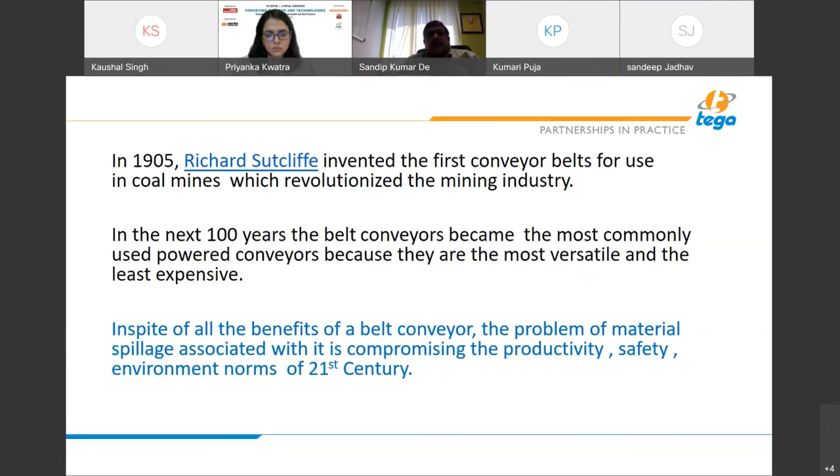We all want this clean, safe, uninterrupted conveying. But unfortunately, this does not always happen this way.

This is sometimes really scary when we go into a plant and encounter this kind of situation. I can feel the pain of the people who have to operate the plants day in and day out and still get the best production out of it.

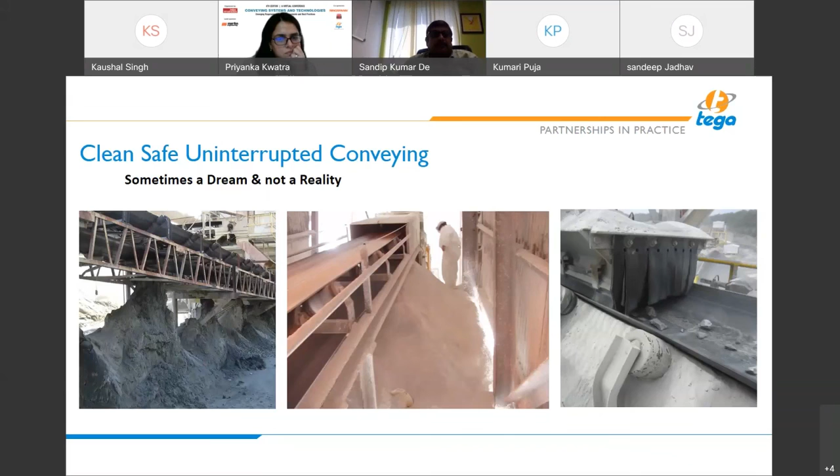All these are very simple consequences: it will increase a lot of maintenance cost of both workmen and equipment, production loss due to unscheduled shutdown, less life of belt idlers and pulleys. There will be high cost because materials will not be salvaged, and power consumption will increase. We all know this.

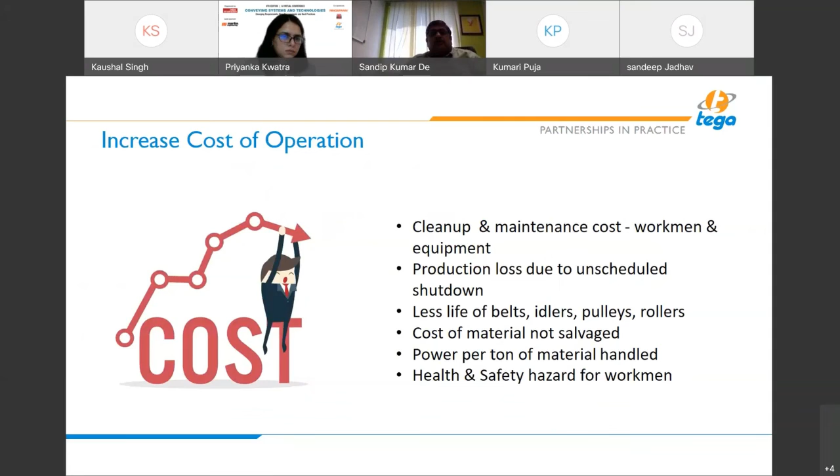But the question that comes to our mind is, why do we land up in this kind of situation? The plants are ultimately designed by engineers, run by engineers, maintained by engineers, and we are all concerned about spillage.

But where actually is the gap? Why do we land up in this kind of spillage, which is not very uncommon?

These are pictures taken from plants all over the country, and as I said, time and again these are quite common pictures. Obviously the people who are here today, associated with this industry and these plants, are also aware that these exist.

Now there can be many reasons; not one reason alone can be a factor. Some of our observations over the years I have put in, and I will try to go into some of those observations and points and elaborate on them.

Maybe some of the points will exist in one plant, some of them will exist in another plant, but overall it can be summed up in this way.

Conveyor systems are designed with a focus on design based on power consumption; today it's also important that you are designing it for safety. I think more focus has to come from the point of designing it for spillage management also.

Obviously this presentation cannot cover all those subjects here, but I will take up one small example just to elaborate on the kind of things that we generally face, which are a constraint for better spillage management in that conveyor.

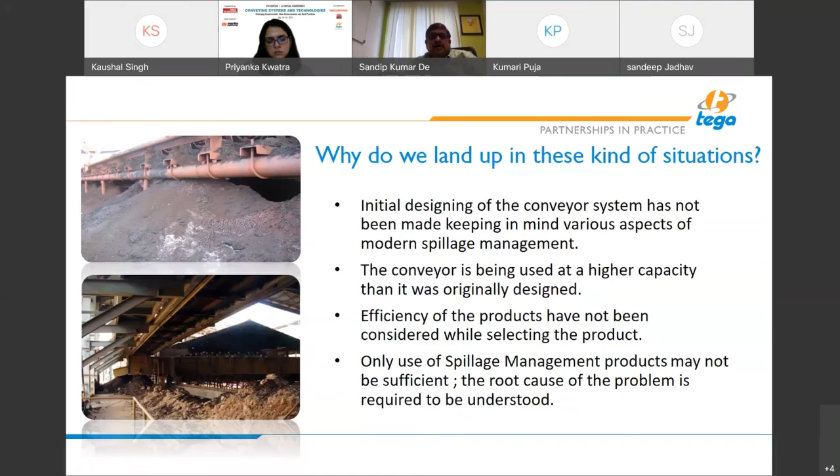Now, moving forward, let me take two small examples of when we go to the plant and find that spillages are happening. I'll explain a little bit on that. A picture on the left, if you really see, shows a lot of material spillage on the side of the conveyor.

Now, if you look at the size of the spillage material, and you have the skirt sealing system in place - although it's quite a traditional product and probably not the best one fitted in the system - still, the amount and size of spillage you can see clearly depicts that it has not happened because of the skirt sealing system that is there.

What probably happened here is that if you really see, the skirt board side plates are absolutely at the side of the belt. Many times you come across loading stations where the skirt board plates are right at the edge of the belt, and as soon as there's a little sway of the belt, you get a lot of spillage.

Now what happens - this is supposed to be not more than two-thirds of the belt width. Sometimes we ignore that, we don't stick to that, and we land up in this kind of spillage problem.

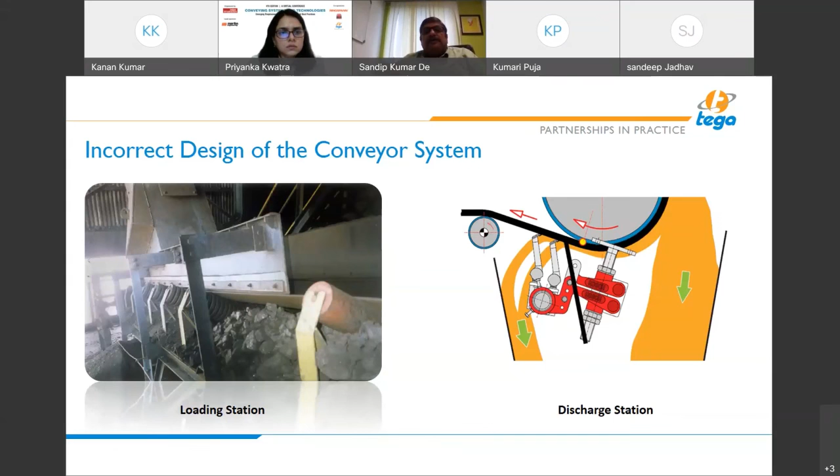Let us talk a little bit about the efficiencies now.

Now, this is what we all do. The conveyor belt will spill material throughout the length of the conveyor at the loading station, during conveying, and at discharge. The sealing system in the loading station is bad, and obviously there is a lot of spillage out there. Maybe the belt is swinging, that's why you have a lot of spillage while conveying. And again, at discharge, there is a lot of carryback spillage coming in.

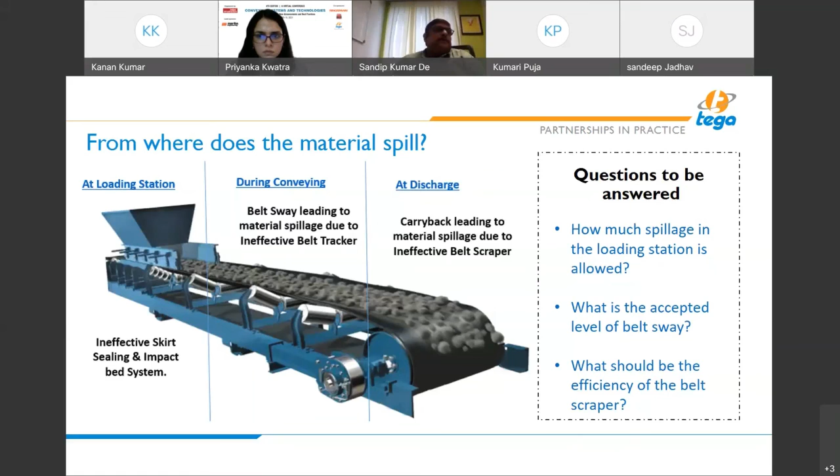But we must be aware of how much spillage in the loading station can be allowed. What is the acceptable level of the belt sway? What should be the efficiency of the belt scraper?

Peter Drucker says that what cannot be measured cannot be improved. These photographs again show you that there is so much spillage in the loading station, the belt is swaying, it is cutting the structure, the steel gets cut, and the steel cutting the rubber. The costliest part of the conveyor system, the belt, is getting damaged. Because of the carryback spillage, you have so much material on the floor.

Even the belt sway has to be restricted within 5% of the belt width, and the scraper efficiencies can be somewhere between 90 to 95%. These are absolutely not very difficult things to achieve, but to achieve this, there has to be certain operating conditions in place, because if you don't do that, these efficiencies will be difficult to achieve.

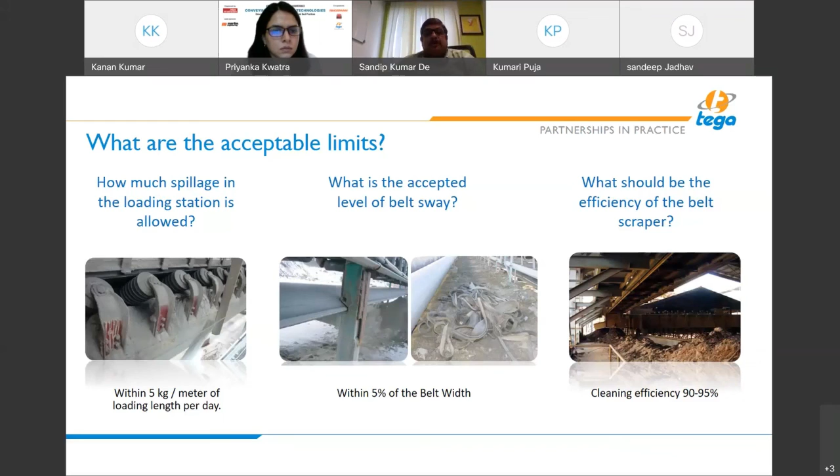When we talk of efficiency here, we need to keep in mind that we are not talking of a big efficiency gap. Here we are talking of efficiency improvements of 2%, 5%, and those itself are huge numbers. When you see a lot of material all over the floor of your loading station, that's all because of the difference in efficiency to this extent. It is not a 30% difference or anything. So we should be seriously attuned to the fact that small improvements can create a lot of difference in the actual results that you get at the site.

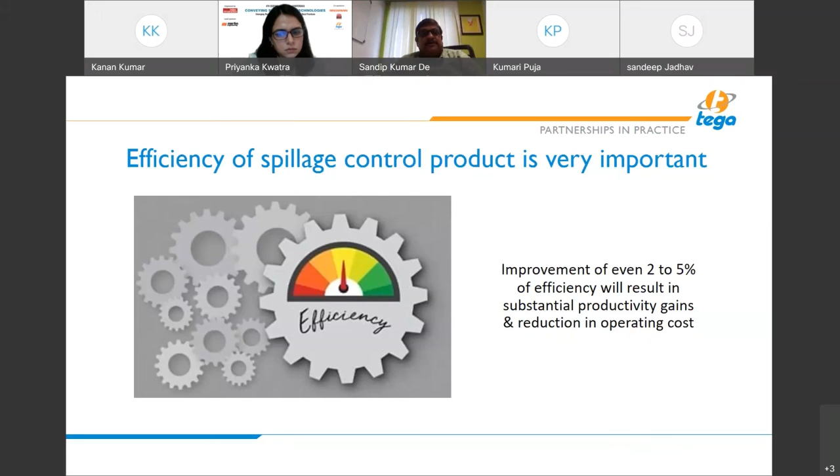The example we are talking about here is a conveyor belt which is 1,000 millimeters wide, running at a belt speed of 2 meters per second, which is a very modest speed. By today's standards, most belt speeds are higher than that; all modern conveyors today are being designed at higher belt speeds. When you have that kind of conveyor with 0.1 millimeter of material sticking at the return side of the belt - remember, we are talking of just 0.1 millimeter - it amounts to about 43 wagons of 20-ton coal on the floor at the end of the year.

So that's a huge amount. When these are the amounts of material deposited on a 1000 millimeter belt at 2 meters per second with a residual layer of 0.1 millimeter, you can imagine what happens in the actual scenario, where the carryback layers are much higher and the belt speed is also much higher.

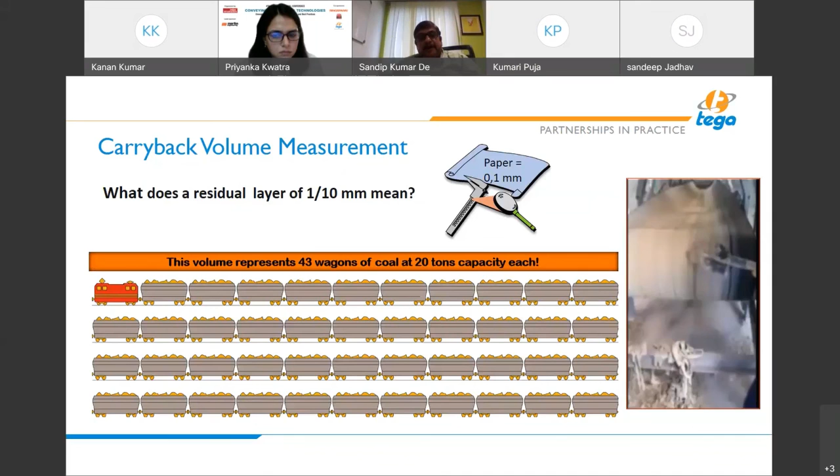I'll take an example from a power plant handling coal, having a carryback of around 1 millimeter, which is again very common. With 40 conveyors of 1400 millimeter belt width - just for calculation's sake, since 1400 is the most popular belt width in power plants - and a belt speed of 3 meters per second, operating 16 hours a day for 250 days a year, because of just a 2% difference in efficiency, you will have around 11,000 tons of extra material on the floor. That's a huge quantity, and it actually happens every time. All the pictures I showed you in the beginning are actually representations of what is happening.

This is happening because of the difference in the selection of the product, which may be good for some other applications but not for that particular application. It is not able to achieve the efficiency it is supposed to achieve, and you end up with that amount of material on the floor. My whole idea of showing you this is to sensitize the fact that when we talk of spillage, we are talking about a huge amount of material at stake, and a little difference in efficiency can create a lot of difference in the quality of cleanliness, or the management of spillage that you can have at your plant.

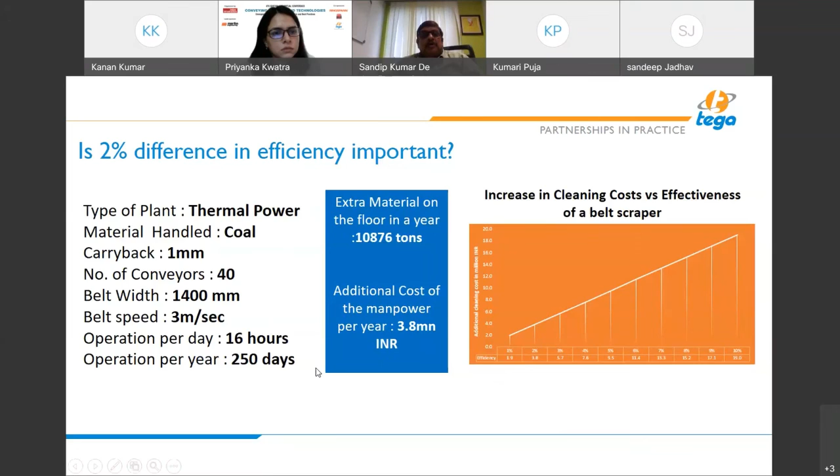So you will find some products that will require service in 2 weeks' time, some products probably will require servicing in 4 weeks' time, and other products that will require servicing in 6 weeks' time or even beyond. So if we are not servicing the product in time, even the efficiency of the best product, probably having an efficiency of 95%, will go down to 90% in no time, or even 85%.

So we again have to be aware, and we need to look into situations where we should be able to select a product, completely aware of the capability of the team at site to service it - by what time it will be serviced - so that the average efficiency you can derive out of the product is at the level that suits you. So the service part of these kinds of products will be completely related and add to the overall efficiency of the whole system.

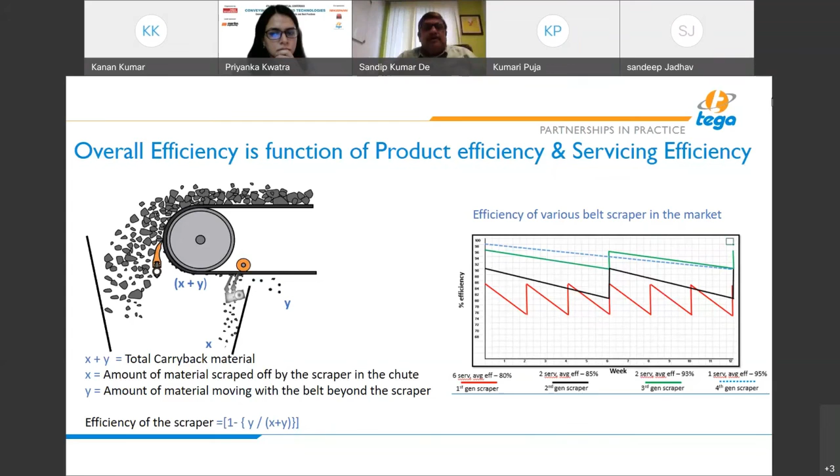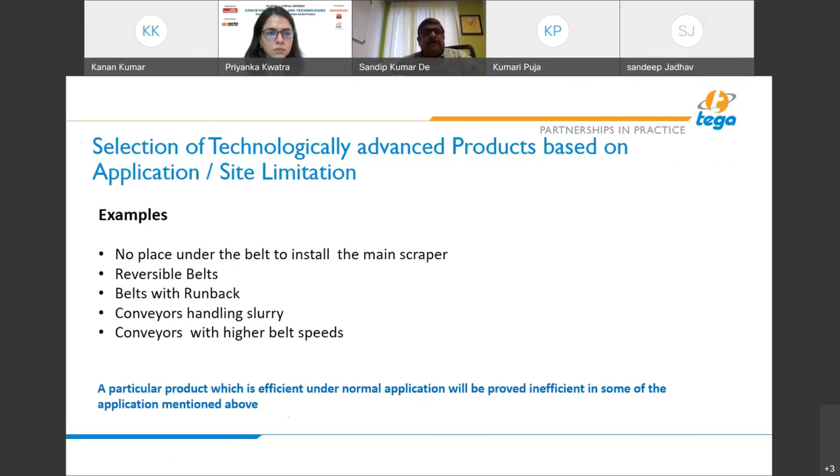Basically, as I was talking about, there are many products which can be good in particular circumstances, but then there are applications which are different, which are difficult. Again, if the product selection is not done in that respect, we can end up with an efficient product in some conveyor proving to be very inefficient in other conveyors.

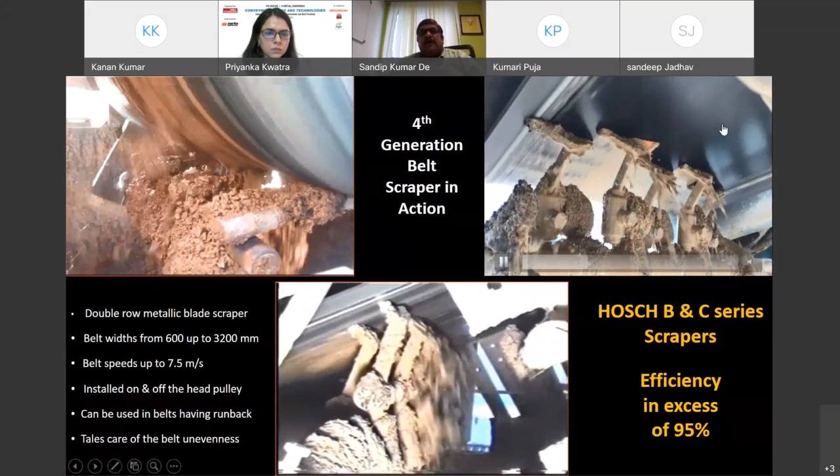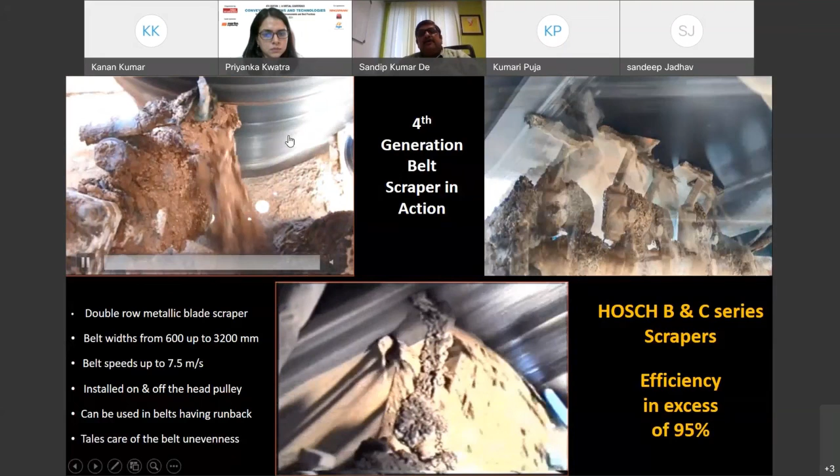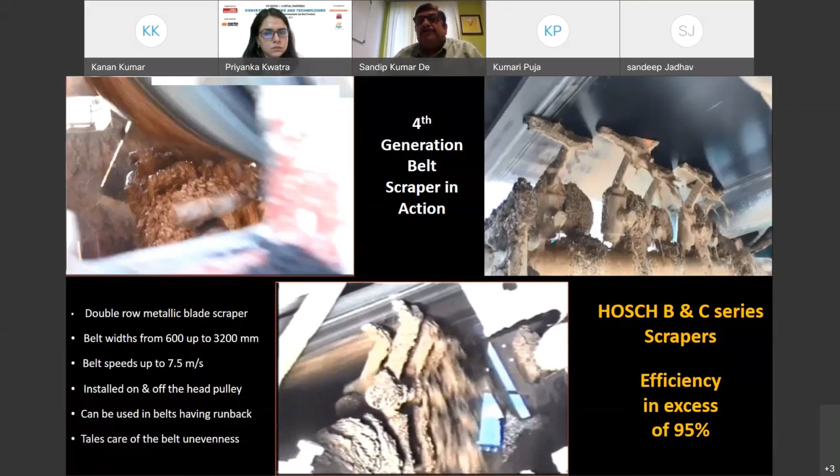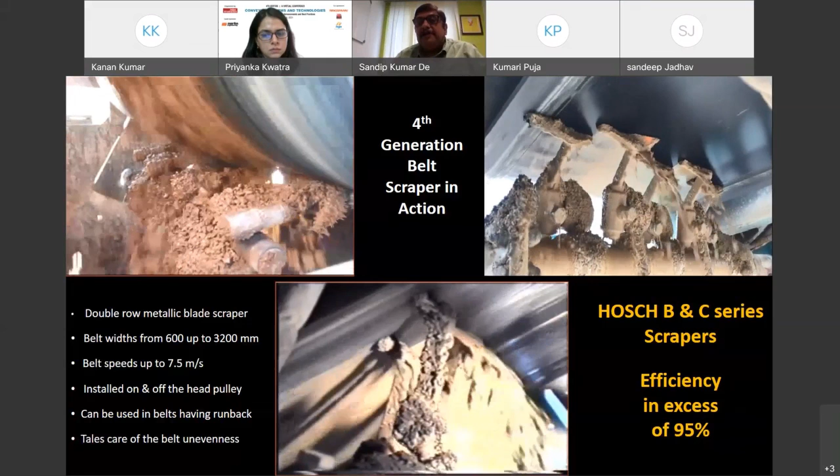This is just a photograph, a video I wanted to show you. Just look on the right side at the belt scraper being shown. Look at the cleanliness on the top right corner, on the bottom middle, again on the left and on the right side - you will understand the kind of cleaning that is achieved today, because products are available to achieve those levels of efficiency. But then again, it is application based, but the products can support that. It can give you the level of cleaning, and as I was saying, even a 0.1 millimeter thickness of carryback can create a lot of issues.

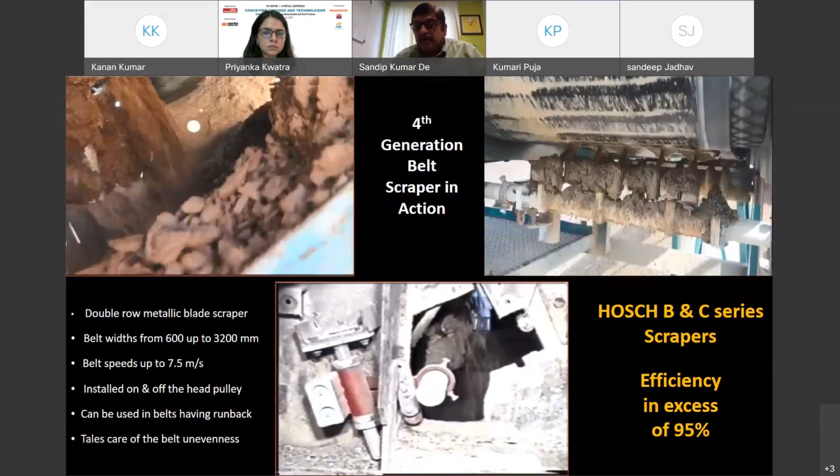I don't have time to talk about all the efficiencies of the product, but just a small brief here. Even when we talk of the belt tracker, the traditional system that we have had over the years - the kind of areas where you can see the kind of systems generally being used. When it is used this way, the basic principle is that the side rollers will push the belt back to the center, and the whole system rotates on a thrust bearing.

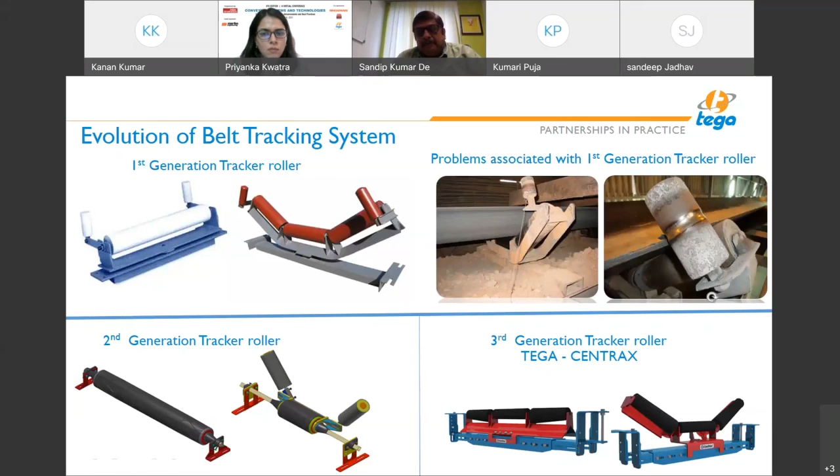But this kind of system does not perform well, and it gets jammed very fast, and it starts damaging the belt edges also. So there are systems available today which do not have this kind of disadvantage, which are much easier to use, easy to replace, and you can get the best results out of it. You can achieve up to less than 5% of the belt sway, less than 5% of the belt sway.

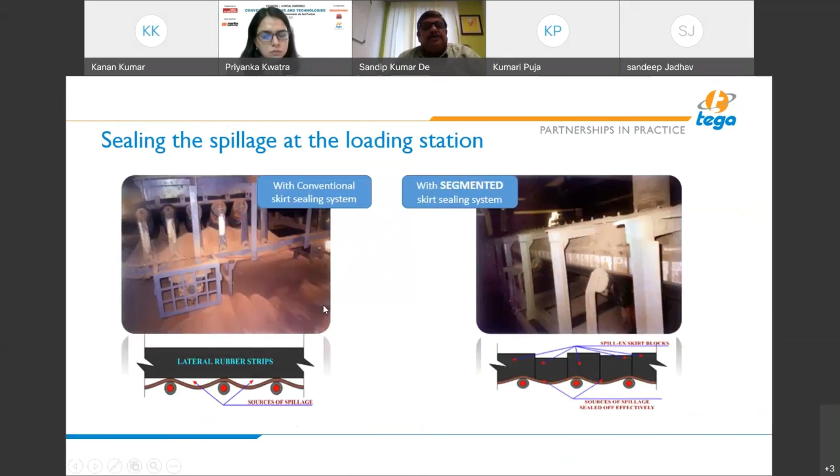Similar are the issues in the loading stations - you have to have proper sealing. Even today, people are using lateral strips, which does not do a good job. While loading under pressure, it creates a lot of spillage all around, where segmented blocks must be used so that you can have complete sealing. It has been proved time and again that the kind of spillage lateral strips cause means you cannot have the kind of cleanliness we are talking about in today's 21st century.

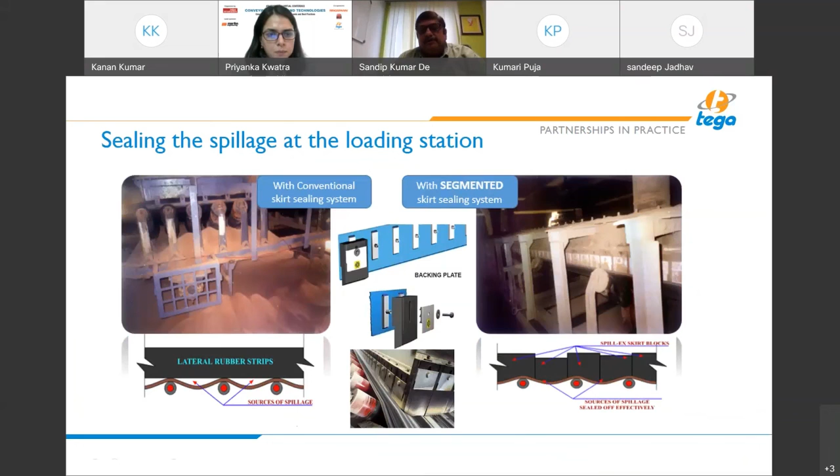As far as the supporting of the belts, similar developments have happened. Improvements have happened where impact idlers are slowly being shifted away from because of the damages happening, the vibrations, and the maintenance required.

Traditional impact bed systems were a good option, and even now there are better products that give complete support to the belts and are much easier to install and replace. These jumbo impact bed systems can be more easily integrated into the system and give much better results to the conveyor belt.

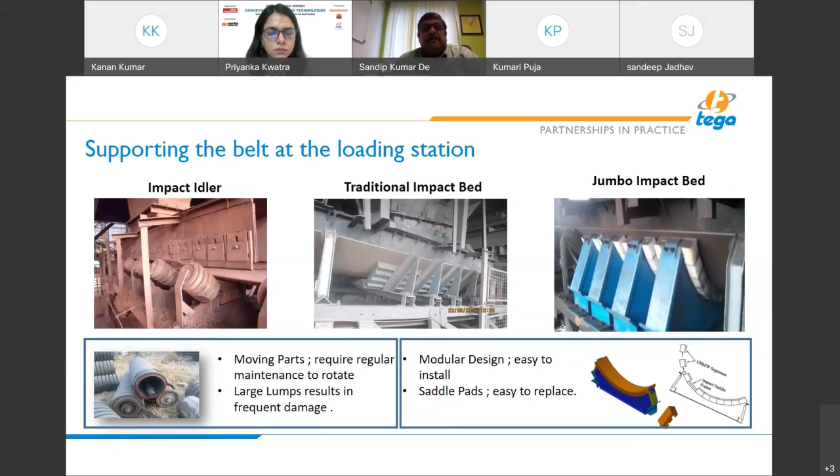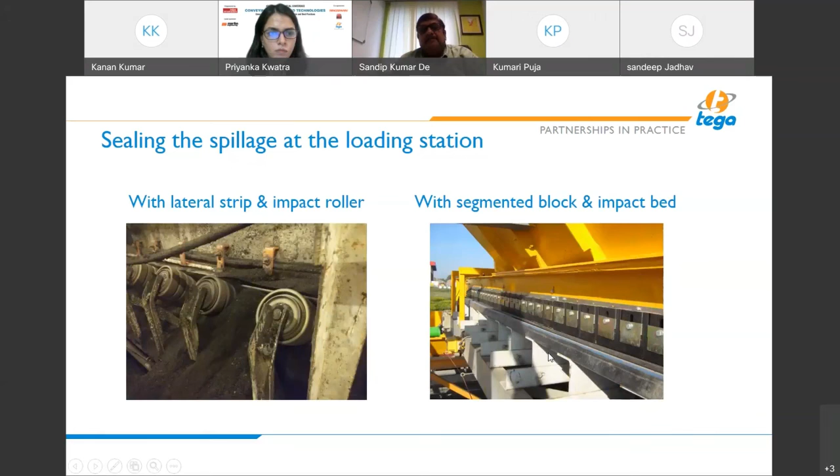Just to come to an end, products alone cannot make this transformation happen. Picture on the left with so much spillage, and on the right, we actually did this in a particular steel plant some time back.

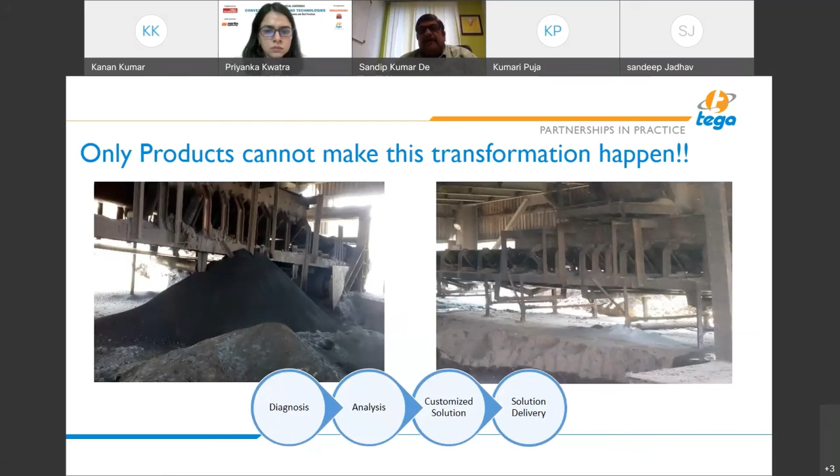This cannot happen just because of the product. When you want to avoid landing up in this kind of situation, the whole problem has to be diagnosed, analysis has to be done, a customized solution has to be derived, and only then can you achieve this. Let me give you a small example of why this is important and needs to be done this way.

If you have a problem of belt sway, why is it moving off center? Because there are some unbalanced forces in the system. Now how do you control the sway? If there is sway, you will try to give a counterbalance force by using the tracker. That's the easiest option, like giving paracetamol for a fever.

But if you are not solving the actual reason for the fever, what happens is you overuse the paracetamol and may not always get the best result from it. So it's important to find out the cause of why this unbalanced force is happening, and we eliminate and reduce it, and then probably we solve it.

Many times we found there is sway, and it's because of something else. Because of a lot of carryback, the rollers get lapped with material, and this carryback spillage left on the rollers gives you an unbalanced force and the belt sways. Putting a good scraper into place, you don't have the sway anymore.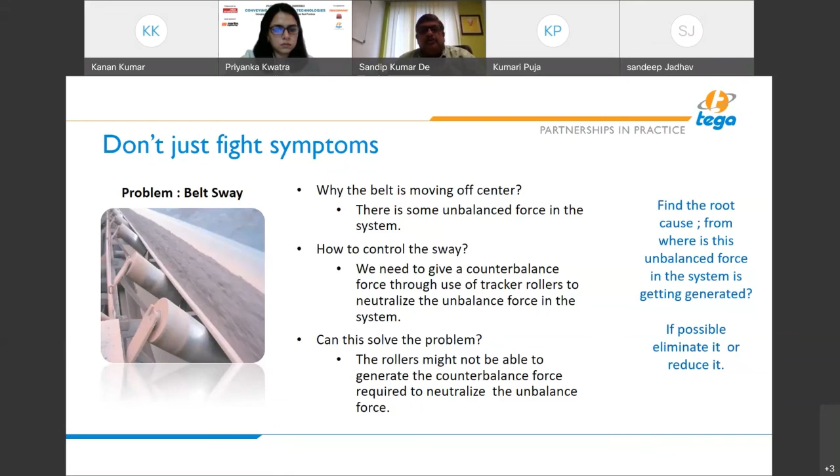So those are the kinds of things where you don't need to just fight symptoms. We need to go into root cause analysis. So at Tega, what we do for any kind of this problem is diagnose the whole thing. We do a comprehensive audit of the conveying system as a whole.

We have our internal software to do it. Other than that, we have experience handling more than 40,000 conveyors. We tailor an engineering solution. The most important part of it is the installation planning, because even if a good product is installed in the wrong place, you will not get a good result. So that has to be followed up with installation support and commissioning and beyond.

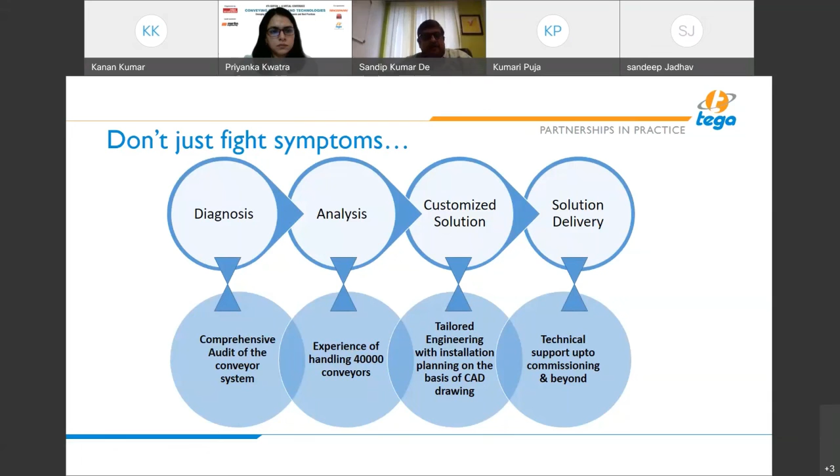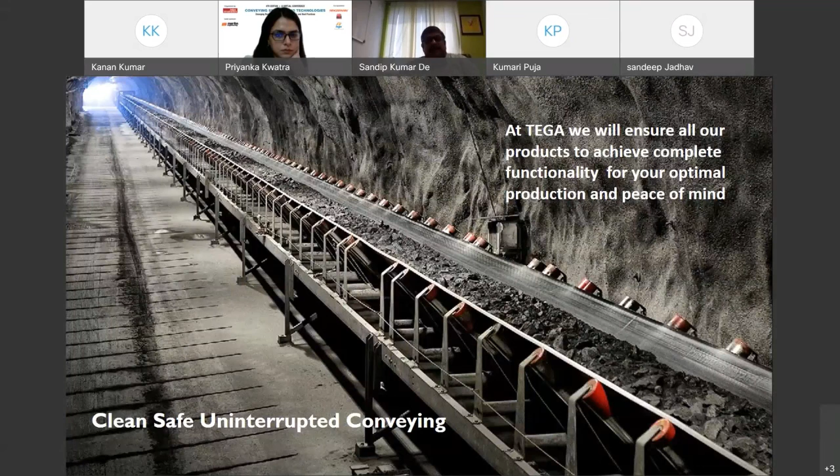So when you do that, you obviously get the result that is expected, and we can give clean, safe, uninterrupted conveying. Thank you.

Are C-series scrapers sold in volumes now by Hosh in India? Sold in volumes, the word 'volumes' has a context to it. For me, it is yes, it is volumes. We have been doing it for a few years now, and now it has really picked up. We've made a very good number of not only sales, but sales is the secondary part of it, and we've got extremely good results in various different areas in India.

So the next question is, can we change the lagging on the tracker? Which MOC of lagging is preferred, rubber, polyurethane or ceramic pads? Yeah, I did not go into that in detail during the presentation because that's the move forward. This is the third generation of the tracker we're talking about, where the small rollers are replaceable.

So whenever you have that problem, the separate rollers get replaced, so you don't really need to replace the lagging part of it. The small rollers are replaceable, and they will get replaced. You don't need to replace the entire tracking system.

As far as rubber and PU is concerned, rubber is always the best material because it gives you a better tracking force. But in certain applications, even the best rubber doesn't give enough life because of certain issues or the nature of the material, and the customer wants long life over sway control.